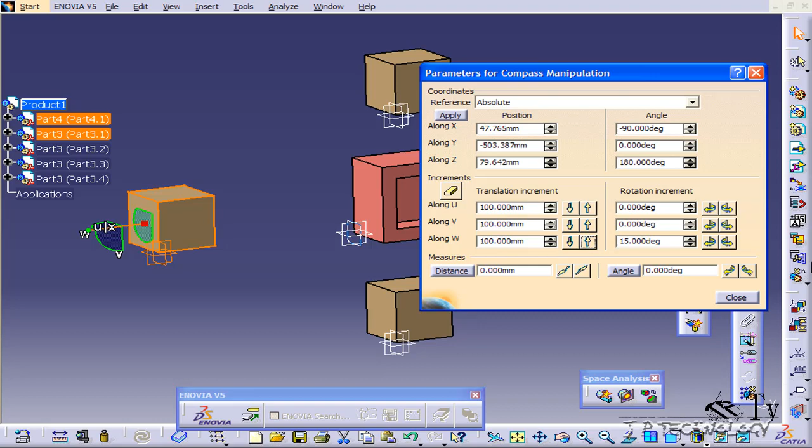If you click them, all of them are going to move, so click the one that you want. Now let's double click on it, and we want it to move 200 along W. It's at 100 now, so we'll click once, twice, click close, and now it's moved 200. So now there's a 300 millimeter gap.

Remember, after you finish, always throw it back up, because if you leave it there, you're still able to move it around. So drag it when you're done, throw it back up.

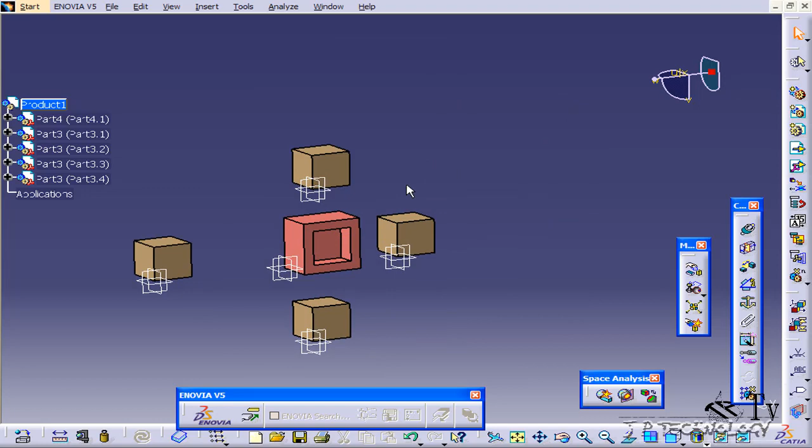Now we'll pull this guy away also. We'll put it on that face there, double click, and this time go negative W and bring it up. Click close, and when you're done, throw it back up. So again, this is just another way to position within your assembly using the compass.

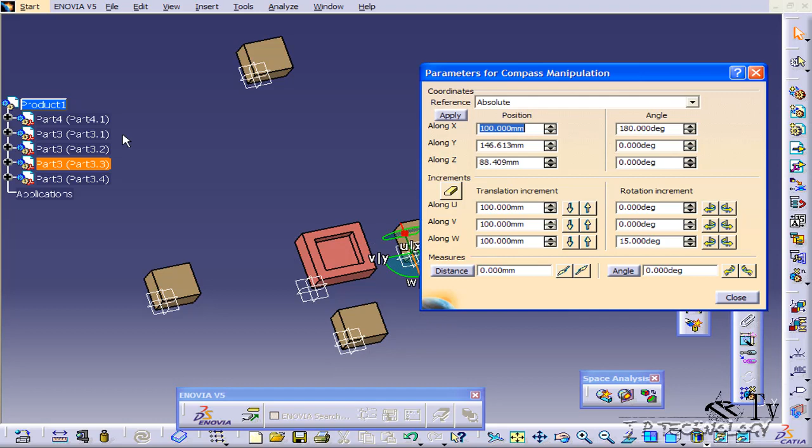Now I'm going to throw it onto an edge, and rotate about that edge. We're going to be rotating about the W. Every time I click, you're going to see that it's rotating, and I'm able to rotate this component. Now I'm going to close it.

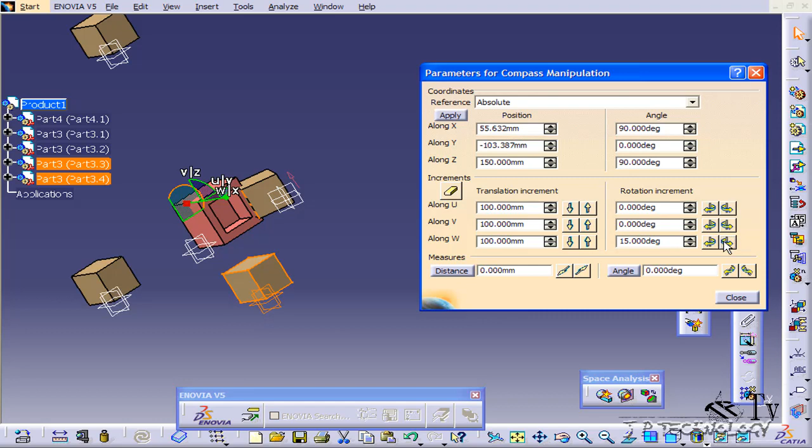Now I'm going to throw the compass onto this edge here to rotate. So I'll throw it there, and I'm going to rotate this part. I'll double click on it and rotate it. As I have it over there, it's a larger rotation radius, so I'm getting a different rotation rather than if I just put it on the same edge. I'll click close.

By using the compass, it's just like using some of these constraints, like your offset or angle constraint. The only difference is that you don't get a little subsection on the side from your constraints tree telling you what's been done if you want to go back and change it. So the downside with using the compass is you don't see a running list of what you're doing, but it's a very easy tool to incorporate all these different constraints for moving your components within your assembly.

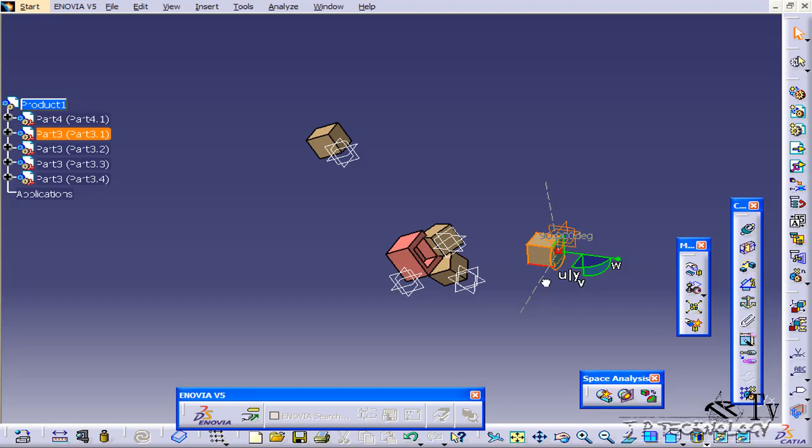Now if we also just throw it on top anywhere and drag it around, you're able to move your assemblies. We'll just click this component here, and let's start dragging and moving them around. So we can rotate them around, and we're able to move this guy any direction we want, and position them.

Also, by throwing the compass on there, you're able to move around your object freely just by clicking the different axes, planes, rotation angles, and you're able to just move it around. So that's another advantage with this. It's a lot easier to move it around rather than using any of these constraints.

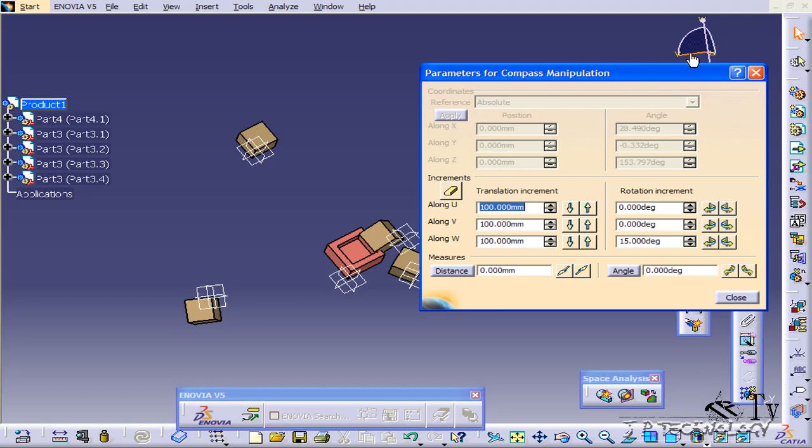And it works pretty much the same as the manipulation tool, except you're able to hone in, and if you double click on it, it gives you an increment, so it gives you a solid number, and it's much more accurate than the manipulation tool. And that concludes our tutorial on the compass positioning within Catia v5.